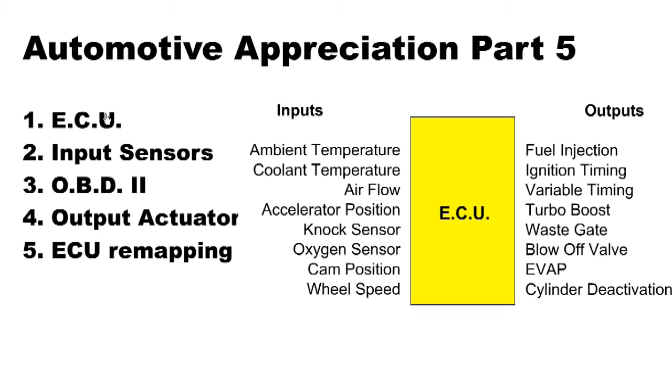Hi, welcome to Automotive Appreciation Part 5. This course looks at automotive control systems, the electronic control unit, input sensors, onboard diagnostics, output actuators, and ECU remapping.

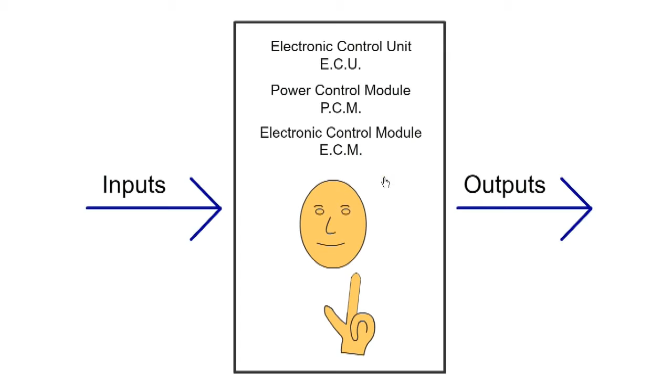The ECU is the electronic control unit, or sometimes called the PCM power control module, or ECM electronic control module. It's the brain and it does the thinking. It works in a harsh environment and is subjected to temperature variations, electromagnetic fields and high vibration.

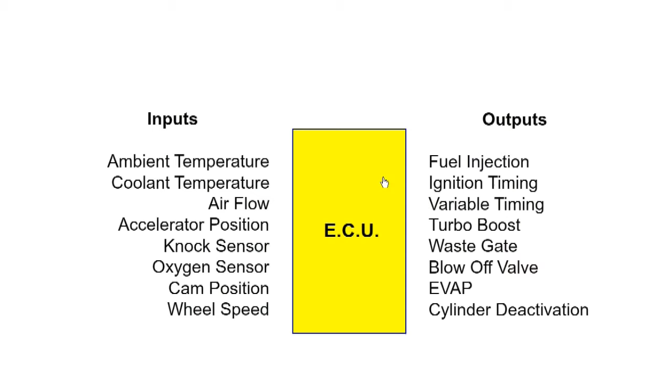First we look at the sensors which input information to the ECU. Speed pickups are based on inductive or magnetic speed sensors. When a toothed ferrous wheel moves past the magnetic sensor, it excites a voltage in the pickup coil, producing an electrical analog waveform. The frequency of this waveform is proportional to the speed of the rotation. They are used for crankshaft, camshaft, and wheel speed sensors.

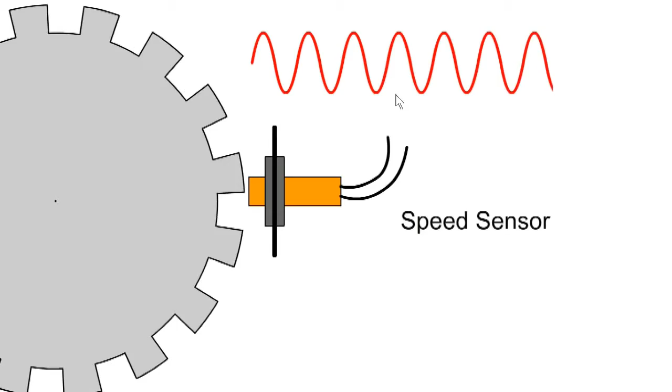The angular position sensor uses a resistor or potentiometer to determine position. As the wiper moves, the resistance is varied and provides a signal to the ECU. They are used for accelerator position and fuel level measurement.

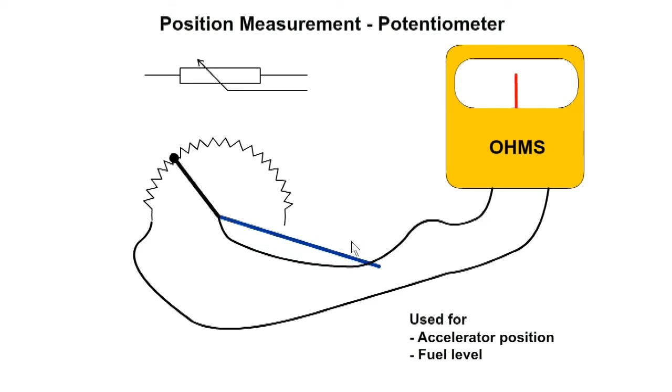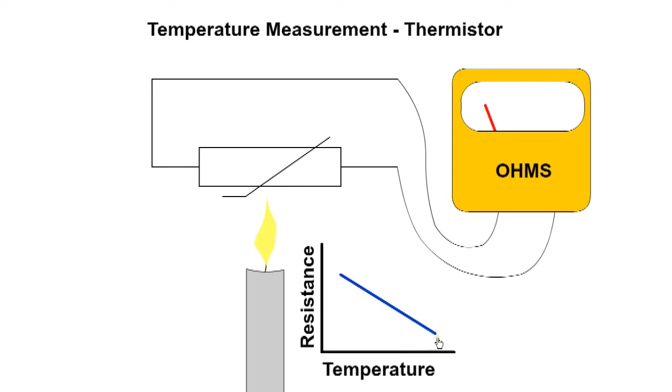Temperature sensors use a thermistor which is sensitive to a change in temperature. It has a negative temperature coefficient. The resistance of the thermistor decreases as temperature rises. They are used for intake air and coolant temperature. When resistance decreases, there is an increase in current, which is converted to a voltage signal for the ECU.

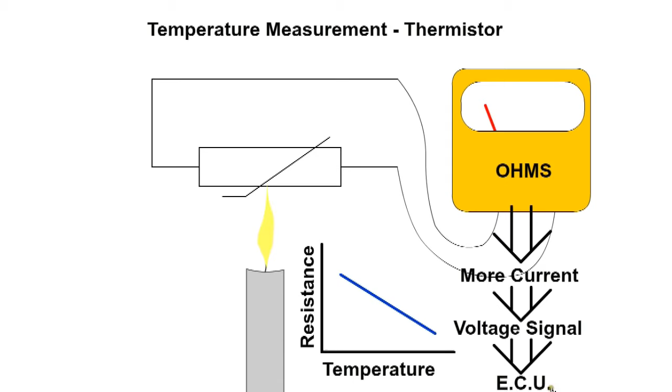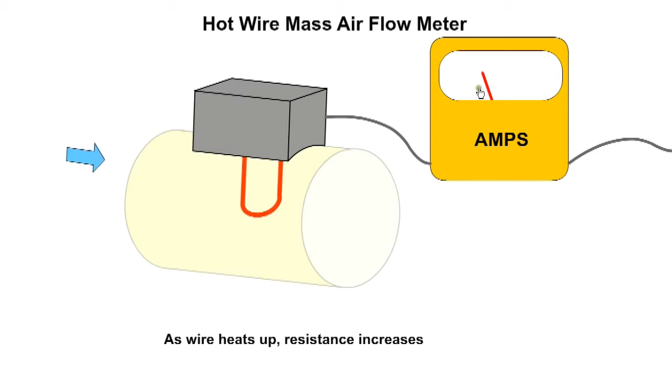The hot wire mass airflow sensor, MAF, measures the flow of air into the engine. When we look inside the housing, we see an electric wire which is heated by an electric current and is maintained at a constant temperature. When the engine is started, current passes through the wire and heats it up. As the wire heats, its resistance increases and it limits current flow. An equilibrium point is reached between the heating effect of the wire and the cooling effect of the moving air.

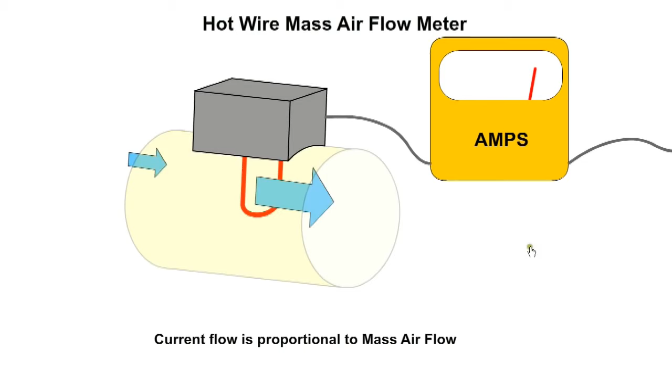When more air flows over the wire, it is cooled. Resistance decreases, allowing additional current to flow until equilibrium is again achieved. The ECU uses the amount of electric current flowing to the heater to determine the mass of air flowing into the engine. It takes into account the temperature and density of the incoming air, and additional correction factors are not required.

The knock sensor allows the ECU to listen to the engine. It is based on a vibration sensor which consists of a piezoelectric element and is attached to the engine block. The energy from the vibrating cylinder block is converted into an electrical signal for the ECU. When the onset of the combustion knock is detected, the ECU will make appropriate alterations to the timing.

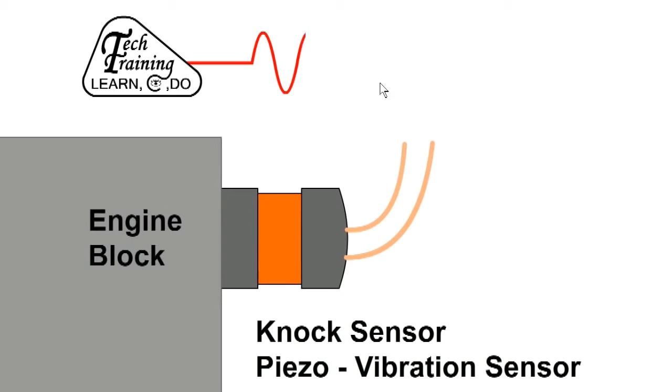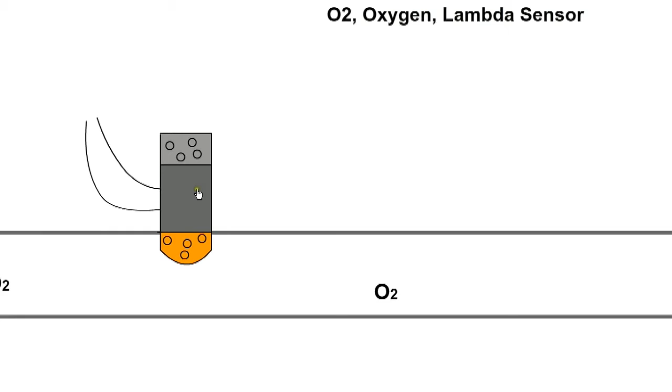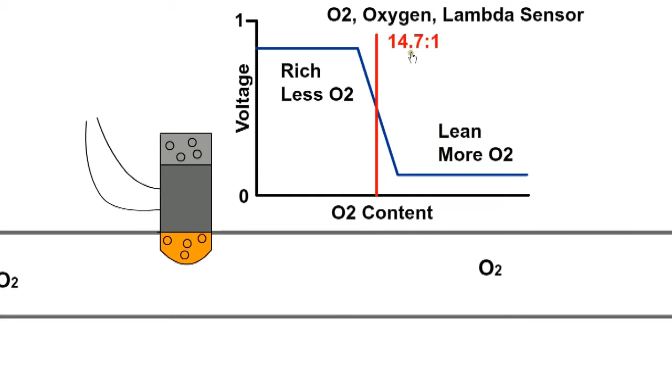The O2, oxygen or lambda sensor measures the amount of oxygen in the exhaust gas compared to the oxygen in the outside air. It generates a voltage from almost 1 volt in rich conditions to near 0 volts in leaner conditions, and the signal is sent to the ECU. The ideal air-fuel ratio occurs near the change from 1 volt to 0. For a petrol engine, the ideal air-fuel ratio is 14.7 to 1 by weight.

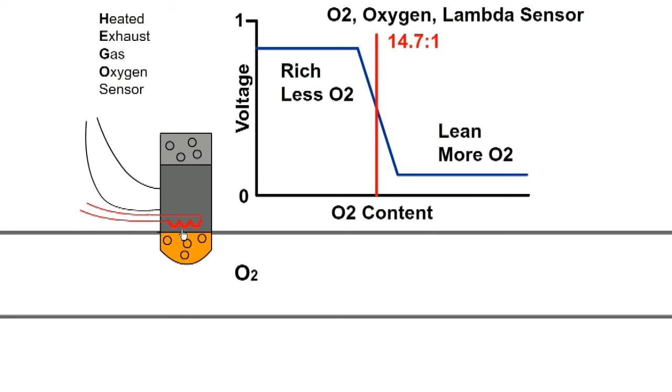Sometimes a HEGO sensor is used. This includes a heating element which gets the sensor up to working temperature faster.

We will now look at the outputs from the ECU. Ignition timing regulates the timing of the spark relative to the top dead center. A signal is fed from the ECU via a relay to the relevant HV coil pack, which is located on top of the spark plug. The coil pack transforms the signal to high voltage for the spark plug.

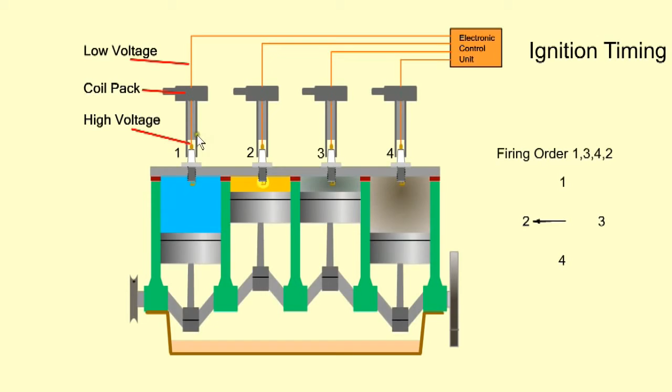Cylinder deactivation: on some cars it is possible to shut down some of the cylinders when not required, usually when cruising at light load. This is achieved by a movable cam which is splined onto the shaft. When the cylinder is not required, the cam for both inlet and exhaust valve is moved away from the cam follower, leaving the valves in a closed position.

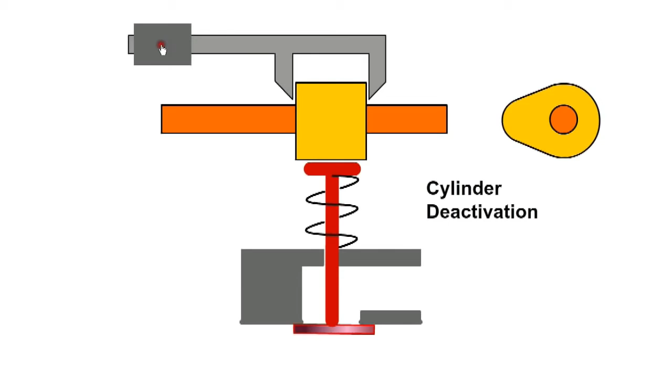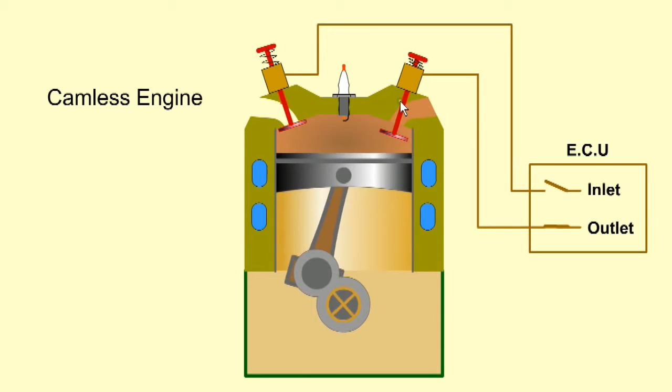A further development with the operation of valves is the camless engine. It does not have a camshaft and relies on electrical solenoids activated by the ECU to operate the valves. This allows immense flexibility with the control of timing and lift of both the inlet and exhaust valves.

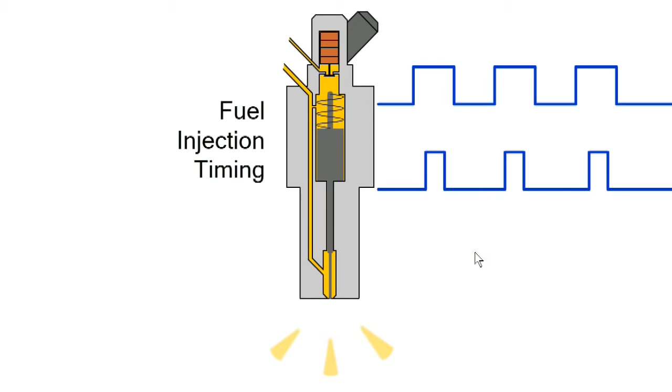Fuel injection injects fuel according to inputs from the accelerator, airflow sensor, and common rail fuel pressure sensor. Fuel quantity can be varied by altering the length and number of fuel injector pulses. When operating in closed-loop control, fuel injection is determined by the exhaust gas oxygen sensor.

Most cars have separate ECUs for different control systems, with each ECU having inputs and outputs. For example, the anti-lock braking system would have a separate ECU to the engine management ECU. All information is transmitted between the ECUs using a bus system called a controller area network, or CAN system. Each ECU is programmed to accept relevant information if required - for example, road speed might be relevant to a number of control systems.

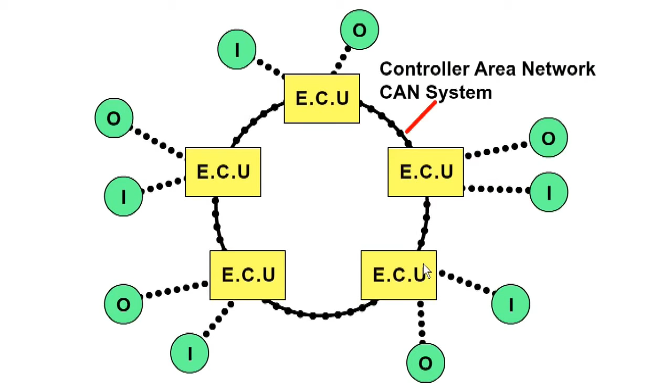Here we see an engine control system in operation. When the engine is started and still cold, fuel injection is determined from the amount of air flowing into the engine. The engine will have additional fuel and run rich. This is called open loop control.

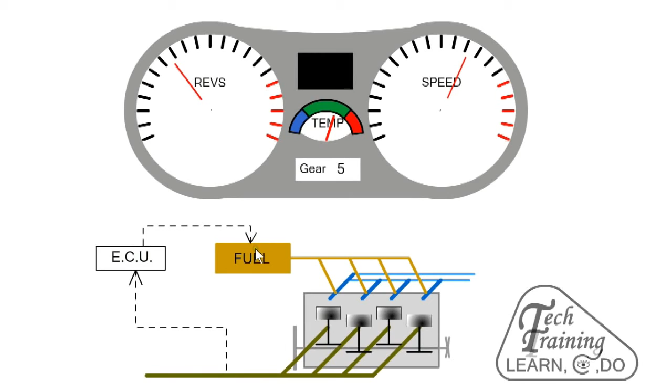When the engine is up to temperature and cruising, the ECU will use the feedback from the exhaust oxygen sensor to determine optimum fuel injection, thus reducing emissions and fuel consumption. This is called closed loop control.

If the lambda probe should fail, the control system will revert to open loop control as there is no feedback from the oxygen sensor. It will alert the driver via the engine management light. Fuel consumption and emissions will be higher, therefore the car should be taken to a garage for repairs.

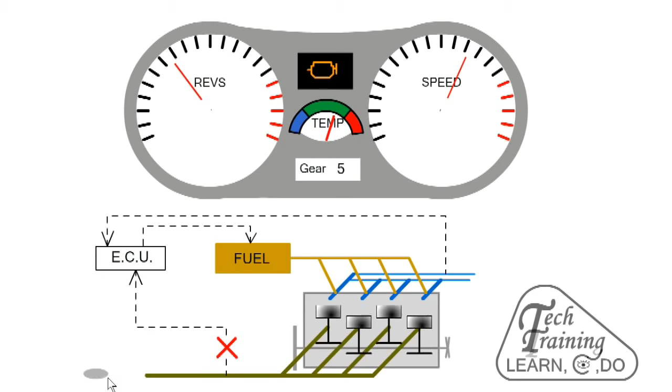The OBD2 standard, Onboard Diagnostics 2, allows code scanners or data loggers to communicate with the ECU. Fault history and fault codes can be downloaded to determine which sensors are not healthy.

Caution must be exercised when using a fault scanner, as quite often when there is a faulty reading from a sensor, the source of the problem might be elsewhere in the system. Also, high resistance electrical cable connections can lead to erroneous readings, so check everything, and as a last resort, change the sensor.

Manufacturers program the ECU according to their requirements, and this information is a closely guarded secret. Normally engines are not operated to the limit, and the designers allow a comfort zone, allowing for extreme ambient conditions or poor quality fuel. Recently there has been an emphasis on energy efficiency and fuel economy.

However, there are tuning companies which specialize in deciphering the program and modifying it, usually to produce more power from the engine. This is often referred to as a chipped ECU.

Here we look at a basic example of an ECU map, graph, or lookup table. The input is the accelerator position sensor and the output is throttle position. In the past they were directly linked by the accelerator cable. Now fly-by-wire is used. For this demo, both have a range of 0 to 100%.

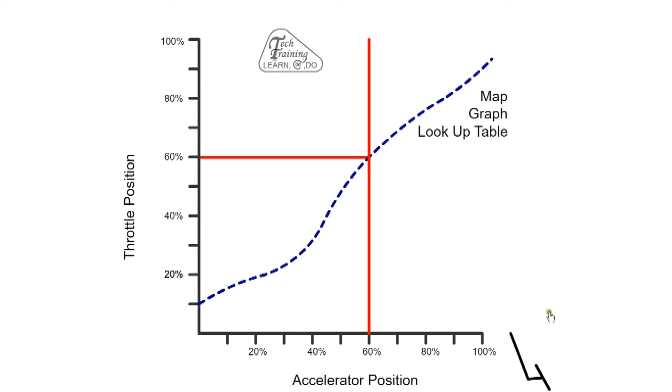Assume the driver wants a more responsive engine and gets the ECU remapped with new software. Now with the new graph, instead of 60% we have 80% throttle opening.

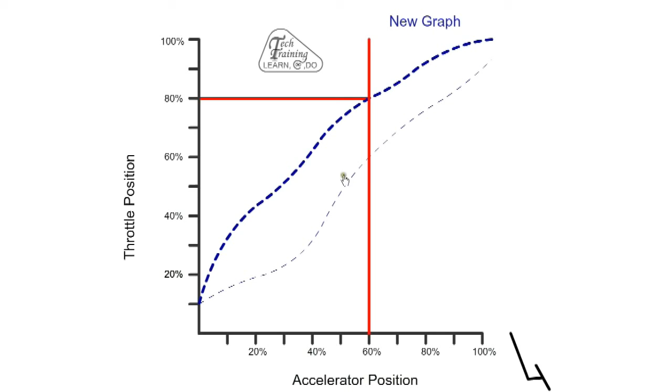Some expensive cars have the option of switching between different programs stored in the ECU. In this case they are called Sport mode and Economy mode.